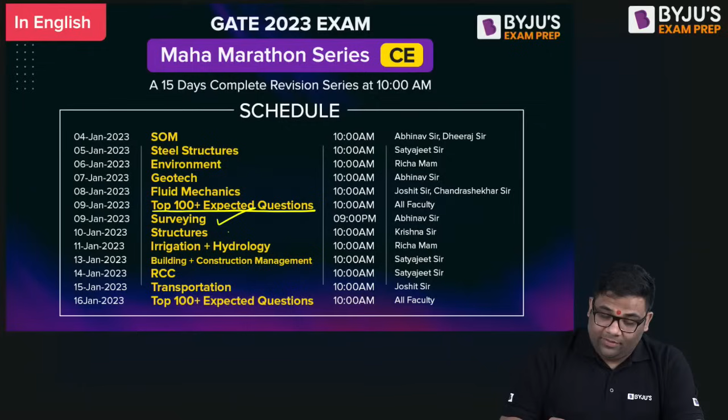Then environment by Richa ma'am, then geotech by Abhinav sir, then fluid mechanics by Joshit sir and Chandrashekhar sir. On the 9th, we are coming up with an expected question series by all the faculties, a mixed session. What happens is that when you're studying only one subject each day, in between we should mix the subjects so we get acquainted with mixing of subjects. There will be a top 100 expected question session, and then we'll continue the marathon with surveying, structures, irrigation, hydrology, building material, CPM, RCC, transportation. So all the subjects will be covered.

We will try to cover as much as possible, whatever has the highest probability. Now time is less, so we should study those things which have the highest probability of being asked in the examination. We should focus on that. So let us start the session without any further delay.

First of all, I will be starting with welded connections. In welded connections, what questions will they ask? They will ask about specification of weld, strength of weld, eccentric welded connection with combined shear and bending, and eccentric welded connection with torsion. Out of these, the first three will be more important, though it doesn't mean torsion won't be asked, but I'll give those more importance. So let's start with the specification of weld.

First we'll see the size of a weld. If you are welding two surfaces like this, this is a fillet weld because the two surfaces are not in the same plane. We'll be discussing fillet weld because most questions are from fillet weld. When you're welding these two surfaces like this, the weld you have done can be approximated as a triangle. This is known as the weld triangle.

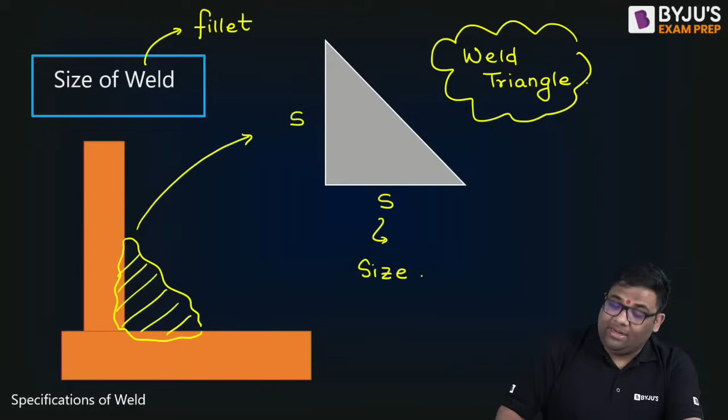Now in examination, what can they ask you? They can ask you the minimum size and maximum size, as an objective 1 mark question. So what is the maximum size of weld?

First of all, to understand the maximum size of weld, you need to know which type of member you have connected. You have connected two plates, you can see here two plates. It is called two plates, or it is also called as what? Square edge. So directly I have taken the provisions from the code.

These screenshots are directly from the code. I will be discussing many things from code and taking screenshots so that you also trust that whatever sir is telling is from code only. So all these are directly taken from IS 800, and I will be showing you the pictures from the IS code also.

This is square edge, yes this is square edge. And this is what? This is round edge, this is round edge.

Now when we are taking the maximum size, you can see that we are welding two plates like this. You have to leave some minimum gap, right? This minimum gap is 1.5. And therefore this becomes the maximum size.

And this maximum size depends on the thinner member. The maximum size will be how much? It will be, I can say, T minus 1.5, because at least 1.5 gap you will maintain. So this is T minus 1.5, where T is the thinner plate, thinner member, I can say.

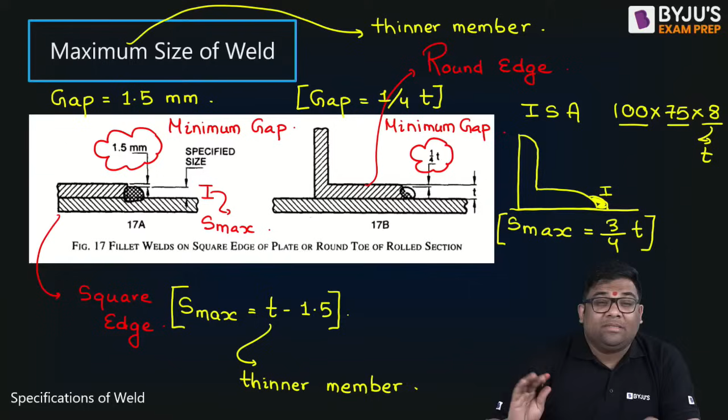So in the examination you have to be a little careful about what they are asking - the gap or the maximum size. Like in square edge, if I ask you the gap, the minimum gap is 1.5 mm. And here the gap is 1/4 of T, and maximum size is 3/4 of T. So please don't jump in the examination seeing the question - read whether they're asking the maximum size or the minimum gap. You have to be a little careful about that.

So this is the maximum size. Now coming to the minimum size - rebates are not part of syllabus, so ignore that, forget it. Minimum size of weld: like you see, maximum size was depending on the thinner member. So minimum size will depend on what? Tell me in the comment section - minimum size of the weld depends on what?

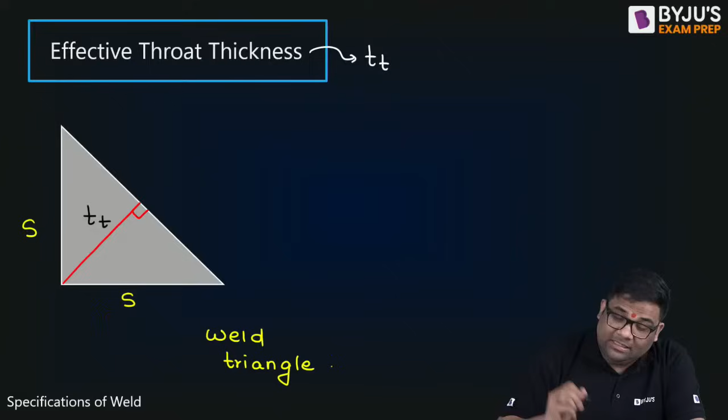And this shortest path is known as the effective throat thickness - the shortest path. So I can say this is the shortest path of failure. I can also say this is the weakest section, because the shortest path of failure is the weakest section of a weld triangle.

Now what does the code speak about, how to find out this throat thickness? Let us see what code writes. We will refer to codal provisions regularly in this course. The codal provision is telling that for the purpose of stress calculation, the effective throat thickness will be taken as K times the size, K times the fillet size or K times the size of the weld.

And this K will be taken from a particular table. Now what is that table? The table is this one, directly taken from code. You can see that for the fusion angle between 60 to 90, it is 0.7.

And after that, you see 91 to 100 there is a decrease of 0.05, again 0.05, again 0.05. So you can see the decreases are 0.05, 0.05, 0.05 - it's easy to remember. It starts with 0.7 and then continuously decreases by 0.05.

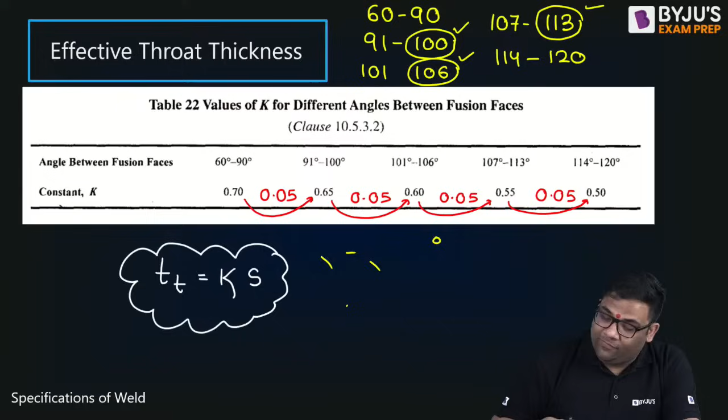So let us solve some questions now, but before that, the actual length of weld. What is the actual length of weld? Now see, you might be seeing diagrams like this. This is the plate and this is another plate, right? Another plate, right? So in the drawings...

Suppose they have shown the weld like this in the drawing. Now this weld which is shown in the drawing, that is the effective length. That is the effective length of weld, LW. So whatever drawing they have shown, that is the effective length. The actual length is a little more than that.

So how to find out that? Let us see. It is written: the effective length of a weld of a specified size. How are we finding that? But after that something is written: the actual length of the weld is made up of the effective length shown in the drawing plus 2 times the weld size.

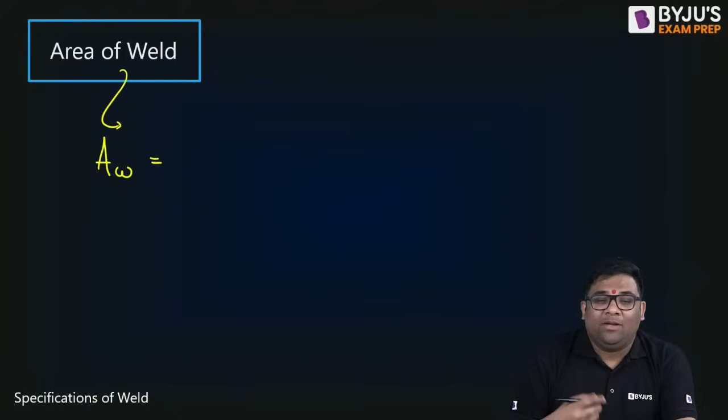So now based on all these things, let us solve some objective questions which they can ask in the examination. First objective question—but again one more thing is area of weld. What is this area of weld? The area of weld is AW. That is simply LW into throat thickness—the effective length into throat thickness. That gives the area of weld, effective length into effective throat thickness.

Good morning, Kavya.

So now, what I've told—we have discussed S maximum, S minimum, the throat thickness depending on the size, KS, then we discussed actual length, effective length, and the area of weld. Okay, great. So, finally, first question—answer this question then.

I'll switch on the AC. Some problem happened.

See, it's an angle section, means what? Round edge. 3/4 of the thickness is the maximum size of weld. So this is the thickness. So 3/4 times of this, I can say directly 7.5 mm. Directly 7.5 mm, 3/4 of your 10.

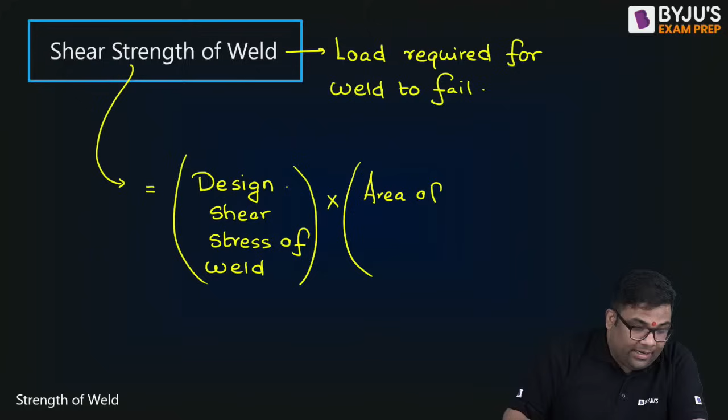So this I can say is the shear strength of weld that I write as: Design shear stress of weld into area of weld. Very simple as that. Design shear stress of weld into area of weld.

Now how to find out design shear stress of weld? The design shear stress of weld is the ultimate strength divided by root 3 into gamma mw. Now the weld material is also steel, right? So steel means there will be two stresses, right?

We know that if you draw the stress versus strain graph, you will get something like this: first a straight line and then something like this, yes, this is the curve, right? So this is the ultimate stress in the steel and this is the yield stress. So when we are finding this design shear stress, we take the ultimate one. Ultimate divided by root 3 into gamma mw. This is the partial factor of safety, or factor of safety for your weld.

And then this value, how much is it? This can take two values, right? If you are doing the welding in the field, then we'll take this as 1.5, right? And if you are doing it in the shop, means workshop, or in a factory, take 1.25. So you can see this is very simple: remember Fu, then you have two factors, root 3 for shear strength and then gamma mw because you have to use the factor of safety. Now area of weld I just told, it is Lw into throat thickness.

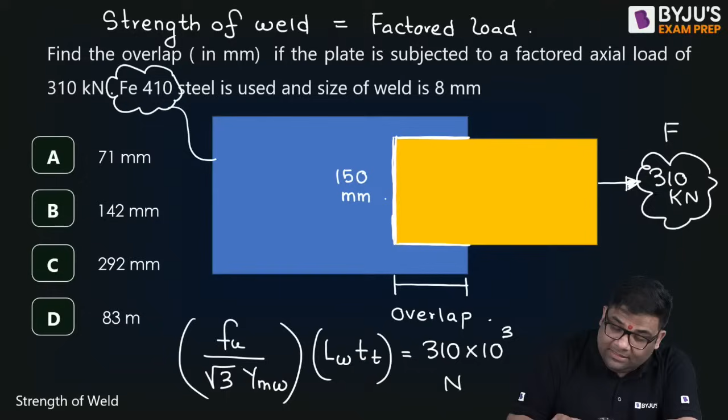This is the equation. Now in this we have to see different terms. See, whenever they write Fe410 steel, what does that mean? This means this particular steel has Fu of 410 and Fy of 250 Newton per mm square. You have to remember that whenever they write Fe410 steel, that means it has Fu of 410 and Fy of 250, right?

Now nothing is mentioned. When nothing is mentioned, by default you will take gamma MW as 1.25 for the workshop. This is the default you will take. If they mention field, then take field value. Otherwise, by default you will take 1.25.

Now, nothing is mentioned, that means you will take the throat thickness as 0.7s. When nothing is mentioned, you take the throat thickness as 0.7s. If fusion angle is mentioned, then we can find out, otherwise not mentioned - so this is how much? 0.7 into 8, this is the size of the weld given.

So 5.6. So ladies and gentlemen, everything is given, or indirectly given. Throat thickness is given as 5.6 mm, then your FU is given as 410 Newton per mm square, okay, gamma MW you will take as 1.25. So by taking all of this, can you give me the LW?

Can you give me the LW? Tell me the LW, how much LW you are getting? Tell me, how much LW you are getting by taking this?

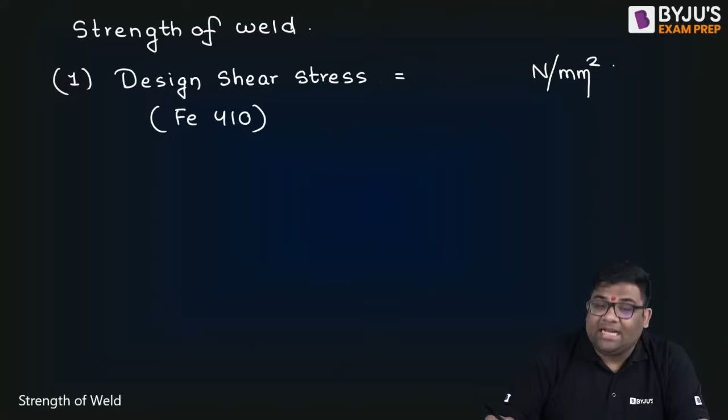Suppose I am telling you it is Fe410 steel, can you give me the design shear stress in Newton per mm square? Tell me, what is the answer to this?

Very good, very good. Directly it is Fu by root 3 gamma MW.

Ladies and gentlemen, be careful that they will ask you small things also. Yes, small things also. I will just request all the students to tell, is there any background noise coming?

Are you hearing any background noise of the AC? That duck duck duck sound? Are you hearing that or not? Yes, it is coming, I'll switch off the AC then. Now it is fine, I think. Now it is fine, na? I think now it is fine. Okay, now also it is like some helicopter sound, little bit. Fine, okay. Now okay, but again it increased. I'll switch it off. Santi.

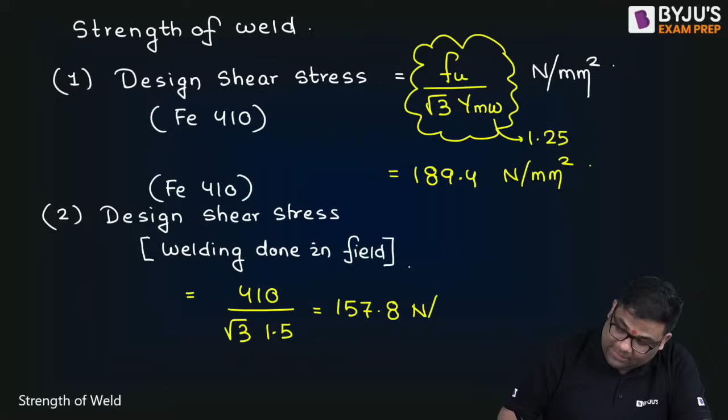Or else, if they ask you the load, this was stress, na? If they ask you the load, you have to multiply simply the LW into throat thickness, LW into throat thickness, that's it, right? Okay, now let us go to the next thing, eccentric welding subjected to shear and bending.

So what I was telling is that eccentric welded connection is subjected to shear and bending. Suppose this is an I section, and suppose we have a plate welded to this like this, and there is a load acting, with welding done over here. I will draw the weld in red color.

The welding is done - I will draw it in red color just to show that welding is done. Weld is not actually red color. And suppose a load P is applied like this. So you can see that from the weld plane, it is at an eccentricity of E from P.

So what happens? There is a bending moment P into E. When you transfer the load, whenever you transfer the load, we have to create a moment also, right? So there is a bending moment. So I can say there are two things acting: one is the force P, and the second one is the moment P into E.

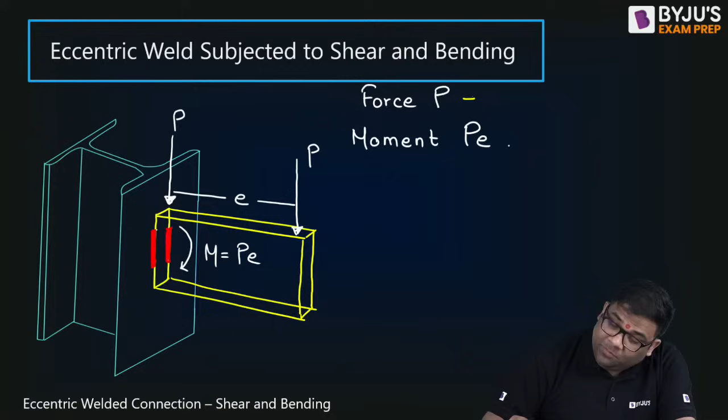Now see, this P is acting in the plane of the weld. So this force P generates direct shear. And the moment generates bending stress. This bending stress is normal stress, right? Yes, this generates direct shear stress.

Okay, Q - and bending stress is normal stress, na? And the normal stress is equal to FB. So therefore, this is a case of eccentric welding subjected to shear Q and bending FB. Now how to find this we will understand, and we will solve a question.

Now very simple, okay. If you see this particular diagram, from the side it will look like this. Suppose you have welded like this - from the side, this is the I section and this is the plate, or it might be another I section also. So it will look like this. This is the P force, this is the E.

So when you transfer the load, what will happen? The P force will act like this, which will act as the shear force - relatively direct shear - and there is a bending moment of how much? P into E. Very nice, right?

Now this will look like this. If I am seeing from this side, it will look like this - the two sides it is welded. So this is welded - this is the depth of the weld. I will call this the depth of the weld. And this will be the throat thickness. This also will be the throat thickness.

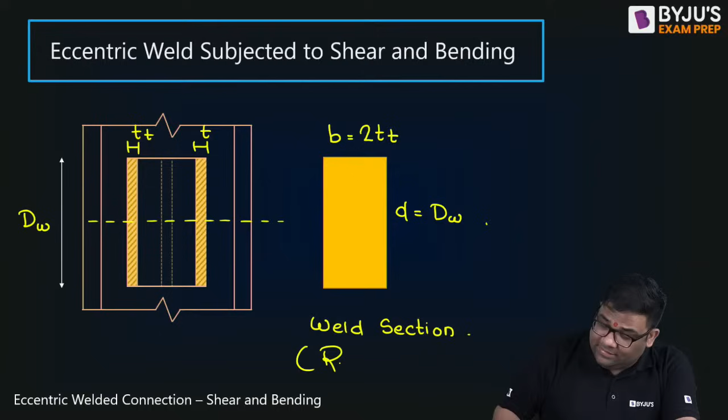So, ladies and gentlemen, this becomes the weld section. So the weld section is having width of 2 times the throat thickness, and depth equal to the depth of the weld. It becomes a rectangular weld section. No need to remember many things - very simple strength of material.

Now what happens here - this width is 2 times the throat thickness, and this depth is equal to the depth of the weld, which will be given in the question. Now, I told that this weld is subjected to 2 things - P, and second one is P into E, the moment.

Due to this there will be shear stress Q. Now shear stress is load by area - so load by simply area of weld, that is B into D. Yes, easy, rectangular area. So B into D. Now, due to this bending moment, there will be bending stress.

And what is the maximum value of bending stress? We have studied in strength of material that it is M by Z. Now M is P into E. Now Z is the section modulus, and section modulus is I by Y max. For a rectangular section, I is BD cube by 12, and Y max is D by 2, giving me BD square by 6.

Game over - so easily we can find out the normal stress, easily we can find the shear stress. This is the direct shear stress and this is the bending stress. See, basically it is strength of material. Once you have drawn the weld section, it is strength of material - that's why strength of material was covered yesterday first. This is weld area, then strength of material. Very simple, right?

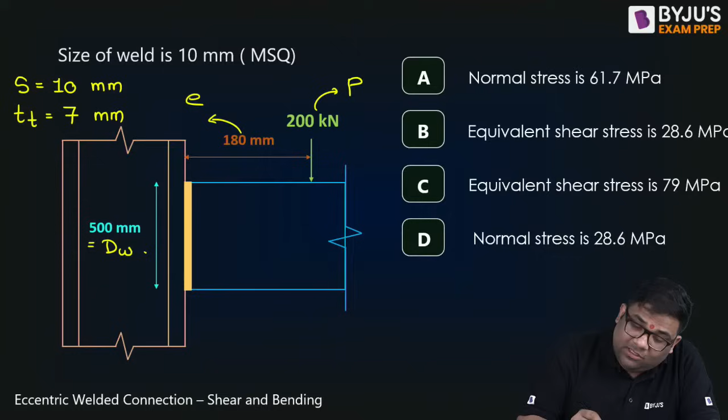See, size of the weld is given, that means S is equal to 10 mm. So what will be the throat thickness? The throat thickness will be 7 mm by default, since nothing is mentioned, so throat thickness will be 0.7 into S. That is 0.7 into 10, equal to 7 mm.

That is okay. Now we have to draw the weld section, the weld area. What will be the B and D? The B will be equal to 2 times the throat thickness, that is how much? I can say 14 mm, right? And the depth will be the depth of the weld, that is 500 mm.

So I know the B and D. If I know B and D, I can easily solve the question, because P and E are also known. So please solve and tell me which options are correct. MSQ, a typical MSQ question, okay? I thought that we'll be solving some MSQ also. Yes, answer.

You need to just draw the section correctly, right? Just draw the section correctly, half paper question is done. A and C, so easy question. So you are easily able to solve this kind of question, right? It will be easily done. So MSQ, don't worry about MSQ.

Tell me now, ladies and gentlemen, if you know the concepts nicely, is there any special worry for MSQs? Should you prepare something separate for MSQs, or is whatever studies you are doing sufficient? If you have done the studies nicely, then there is no requirement of any separate study for MSQs. From the same concepts only, they will form a different option. So don't worry about MSQ, focus on understanding the concepts. If you understand the concepts, MSQs are also easy.

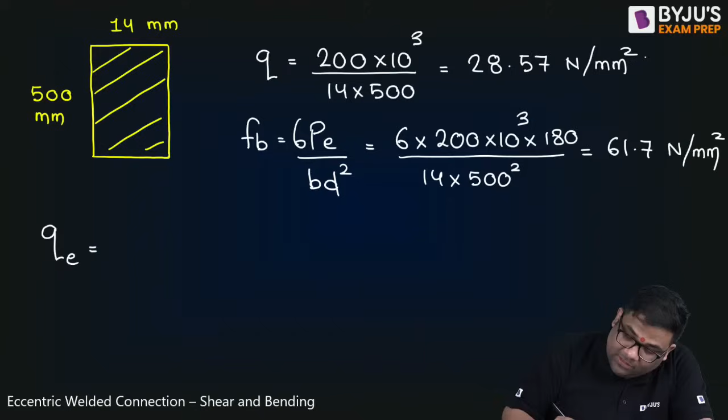Yes, so I can easily find out the equivalent shear. So the equivalent shear stress will be how much? Root under Q square, 3 is Q square, so FB square plus 3Q square. How much are you getting this value? Root under 61.7 square plus 3 into 28.6 squares. So how much are you getting this equivalent shear stress?

79.1 Newton per mm square.

Let us go to the options now. So normal stress is 61.7, that is correct. Equivalent is also correct. Normal stress is not 28.6, shear stress is 28.6. So answer is what?

Answer is A and C. Try to understand, ladies and gentlemen. The small q is the shear stress. Bending stress is the normal stress.

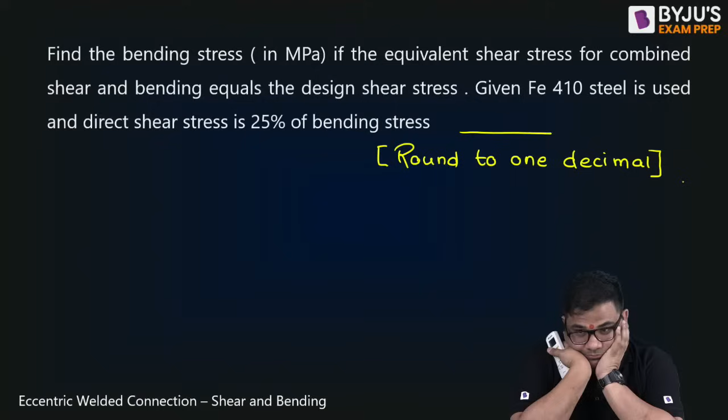Let us switch on the helicopter. First you try, take your time and try.

Helicopter is not landing. Hey bhai, land ho ja bhai. Ha, landed. Okay, let us solve this.

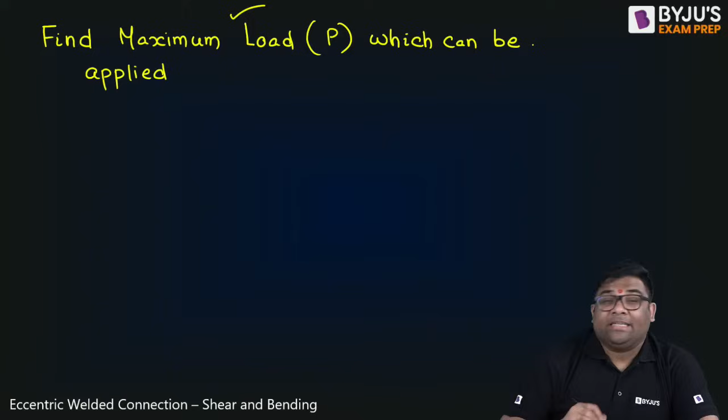So when they ask questions like this, how to solve? This is reference to the previous question. Very easy - maximum load will be for the condition when the equivalent shear stress is equal to the design shear stress. Because if you apply more load, it will cross the design shear stress and the weld will fail. So maximum load will be for this condition.

Now, what is the shear stress in terms of P? That is P by area. Suppose P is in kilonewton, if I want to find the stress in Newton, I'll convert P into Newton, divided by area. What was the area of that weld? 14 into 500, right? In the previous question, if you remember, the weld area was this one.

14 into 500, right? So how much Q you are getting? Tell me, in terms of P you will tell me. Almost 0.143 P, right?

Now, next is FB. FB was PE by BD square by 6. So what I can write, this is 6 into P, I'll convert P into Newton. Then E is fixed, that is 180, divided by BD square. So can you find out FB in terms of P? Tell me how much is FB in terms of P. Find out that.

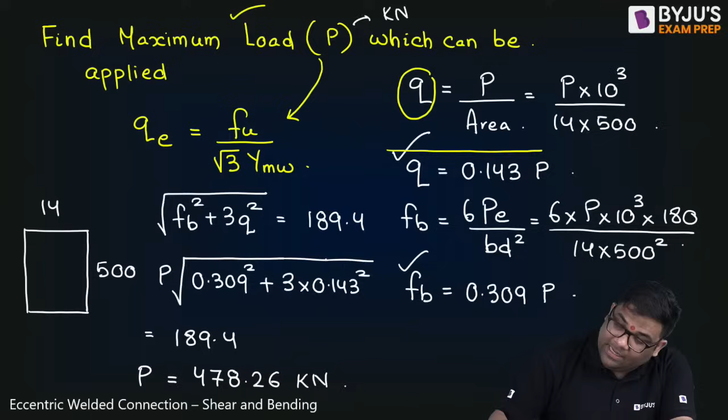The second type of question they will ask in the examination is that they will ask you the maximum load which can be applied, like this. So what do you do in that case? The area of weld will be fixed, so you'll find out the direct stress in terms of P like this, and then you will find out the bending stress in terms of P like this. Then you will find out the equivalent stress in terms of P, and that you will equate to the design shear stress.

By this you can find out P. Just remember, the P you will take in kilonewton, so while finding the stresses, don't forget to multiply by 10 to the power 3. There are two types of questions they will ask in the examination from this eccentric welded connection. Hope everything is clear to you, right? This kind of question I solved for you, and miscellaneous and aptitude type questions also they can ask from the same equations.

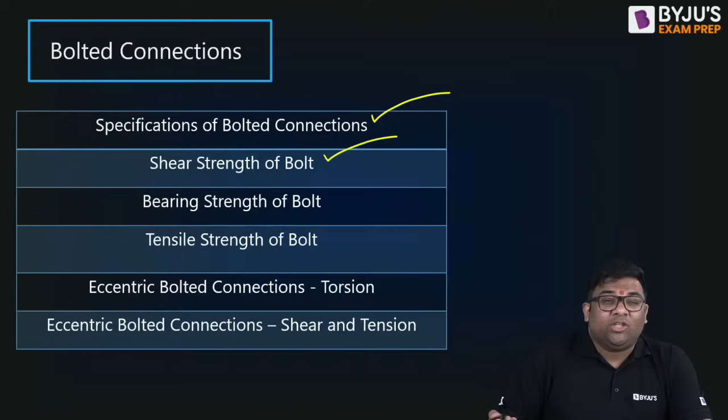Time for bolted connections, time for bolted connections. In bolted connection, ladies and gentlemen, these are the important topics: specification of bolted connections, shear strength of bolt, and then the bearing strength and the tensile strength. There are three types of strength of a bolt: one is the shear strength, one is the bearing strength, and one is the tensile strength they will ask you. And specifications they will ask first - a lot of questions are asked from specifications. Then there is eccentric bolted connection - torsion, and eccentric bolted connection - shear and tension.

Chalo, then we'll start the session. We'll start with specifications of bolted connection.

In specifications of bolted connection, the first thing is minimum pitch. Now when discussing minimum pitch, first understand what is pitch. If you have a bolted connection connecting two plates, and force is applied in this direction, then the center to center distance in the direction of force is known as pitch.

Now when we are talking about minimum pitch, what does the code tell? The code tells, and this is directly from code, it is 2.5 times the nominal diameter of the fastener, or bolt. So the minimum pitch is equal to 2.5 times the nominal diameter of the bolt. This small d is the nominal diameter of a bolt.

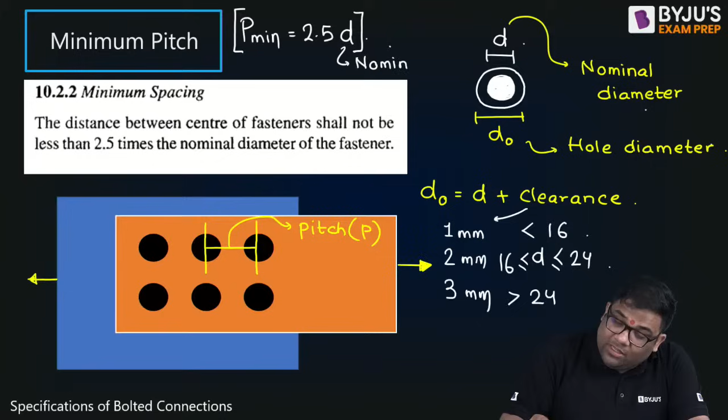So minimum pitch, remember, does not depend on the hole diameter. It depends on the nominal diameter.

Next thing, the maximum pitch. The minimum pitch was independent of whether it's a tension member or compression member, but maximum pitch depends on whether it's a tension member or compression member. It is written that the distance center to center between two adjacent fasteners or bolts, that is the pitch, should not exceed - shall not exceed means less than equal to, or the maximum value is equal to

16T or 200 mm, whichever is less, meaning whichever is minimum. This is for tension members. If you are applying tension to the connection, then this is the rule for maximum pitch.

Now the same maximum pitch becomes 12T or 200 mm, whichever is less, or minimum, if it is a compression member. So these are the clauses for minimum pitch or maximum pitch.

Rightly they can ask questions on this, we'll solve problems too, don't worry. Now next thing is minimum end or edge distance.

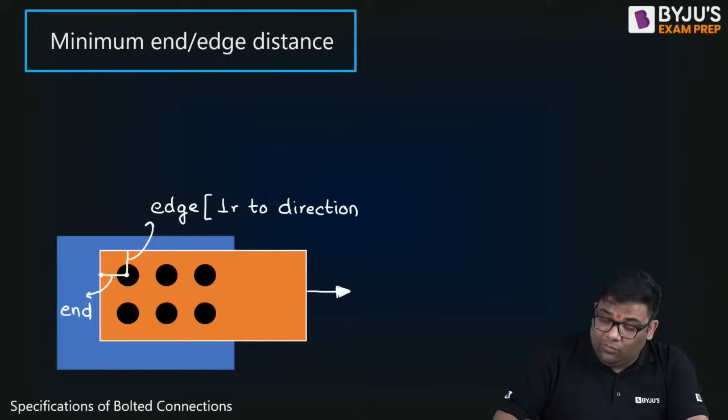It is edge distance, very understandable, but still definition wise, it is perpendicular to direction of force. Whereas this end distance is parallel to direction of force. Now these small things can also be asked as objective questions, therefore we are discussing direction of force. Now what does the code tell about this?

What will be the minimum end or edge distance? The code tells that the same clause is applicable. It is 1.7 times the hole diameter, not the bolt diameter or nominal diameter as in minimum pitch. It is the hole diameter if it is sheared or hand flame cut.

And it is 1.5 D naught when it is rolled or machine flame cut. By default we can take this one, either machine flame cut or rolled, since normally we find this. So by default we take this if they don't mention anything. If they mention hand flame, then you have to take 1.7, but if they don't mention it and we are not told, then we go for this 1.5 D naught. This is the minimum end or edge distance.

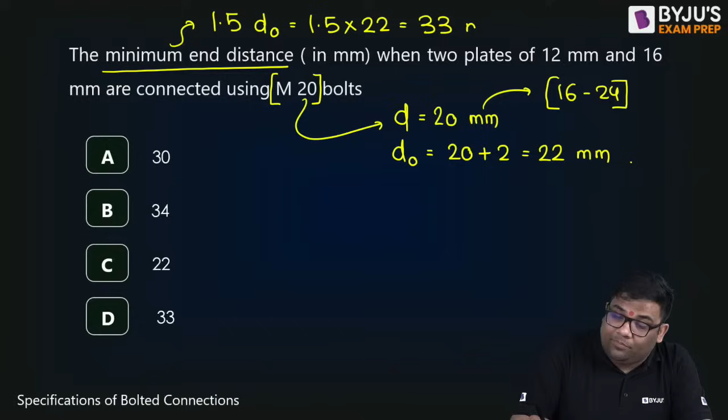Whenever they write M20, it indirectly means the nominal diameter or bolt diameter, given as 20 mm. So what will be the hole diameter? This falls in the range of 16 to 24, so the clearance will be 2, giving 22 mm. It is asking minimum end distance, so we take 1.5 D naught, which gives 1.5 into 22, equal to 33 mm. So typical 1 mark question for gate.

Next question, solve and tell me the answer. The minimum pitch when two plates 12 mm and 16 mm are connected using M20 bolts. M20, M22, M16, that means the bolt diameter or nominal diameter. Remember that. Answer this.

What is the answer to this? Minimum pitch is 2.5 times of simply D, not D naught, simply D. Straightforward question, 2.5 into 20 giving 50 mm. Next question.

Solve this question. The maximum pitch. Read the question properly. All the 4 options I will fill in. Let us see. Solve this.

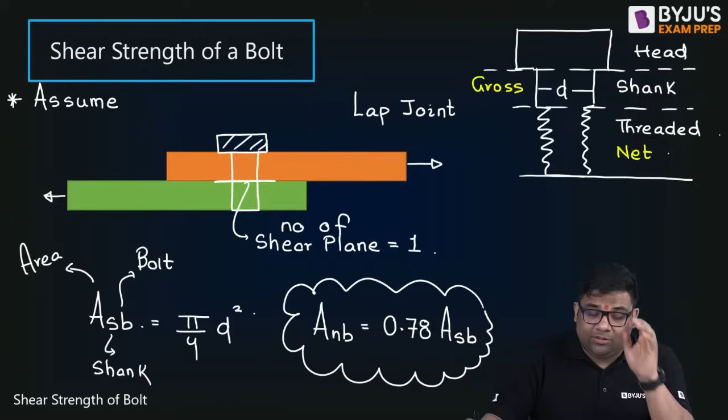Now this shear plane by default, it can pass through the shank area also, it can pass through the net area also. But if it is not mentioned in the question whether it passes through shank area or net area, then what do I assume? Assume the shear plane passes through net area. This is the assumption we take if it is not mentioned in the question.

If they give shank area, very good, I will take that as shank area. If they give net area, very good, but if they don't mention, then I have to make this assumption. Okay, so this is a lap joint we saw. In a lap joint we have one shear plane, it passes through the net area, nothing is mentioned.

Now the next thing is a butt joint. You can see it's a butt joint. Here in a butt joint, these are known as the main plates, and these are known as the cover plates - main plates and top and bottom cover plates. And this is known as a double cover butt joint.

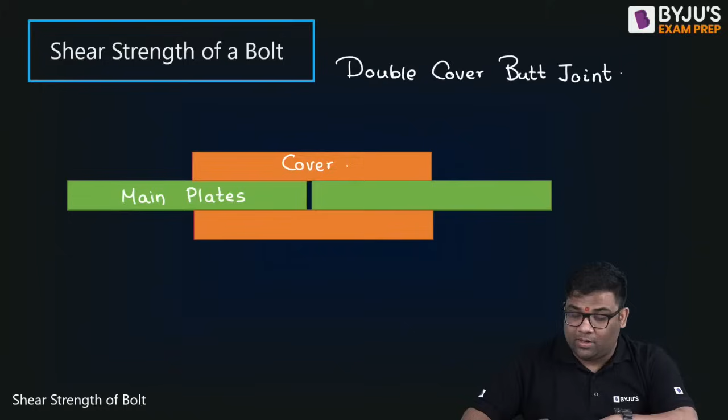Now, if I have a bolt like this, let me just draw one bolt here. If I draw only one bolt, I have bolted like this. You can see that there are two shear planes - one shear plane is this, one shear plane is this. So there are two shear planes in a double cover butt joint.

And I assume that both of them pass through net area if nothing is mentioned. Now coming back to the shear strength of the bolt - this is the load, I can say. Shear strength of bolt is actually the load. So how do we find out the load?

Pardon me, just have a cough. There must be two bolts. I told that I am drawing only one bolt, but I will draw two bolts now. I will show you the top view, and I will show the threaded portion.

It was just to show one bolt. Let me draw so you can understand, but I don't want to just draw randomly - understand the context of what sir is explaining. I told you I am just showing one bolt, but there must be two bolts.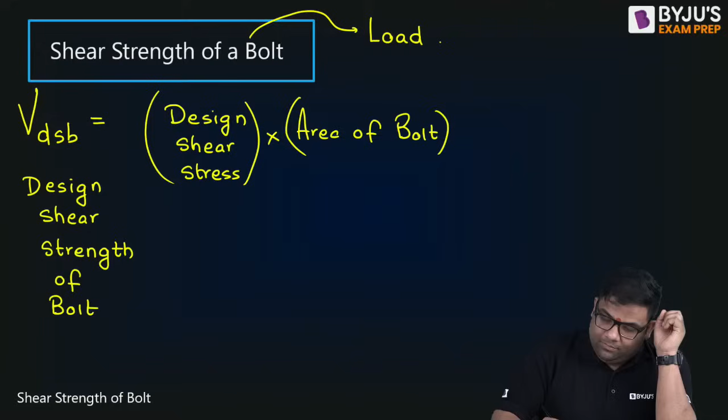Now see, design stress will be very similar to what we studied in weld. Remember there we studied Fu by root 3 gamma mw, right? Here it will be similar, but in case of weld it's W, here it will be B because it's a bolt. And here it will be FUB, which means the ultimate strength of bolt. So it's very similar to what you studied in weld actually.

And here, since all the bolts are prepared in the workshop, it will always be 1.25. Here there is no concept of 1.25 or 1.5 separately. In weld we have the concept of 1.25 and 1.5, but here only 1.25.

Now how to find out this FUB? That comes from the grade of bolt. So if we have a grade of 5.6... let me take something else, like 4.6. How to find out? You take the number before the decimal and multiply by 100. Suppose I'm taking 4.6, so 4 multiplied by 100 gives 400. This is your FUB - this is how you find out FUB.

Now you take the remaining 0.6 and multiply it with the FUB. You will get the FYB. Easy - I can say 240.

Now suppose I tell grade 8.8. In this case you take the 8 and multiply by 100, I get 800, right? You take the remaining 0.8 and multiply with the FUB, this gives you FYB. Multiply with this, suppose I am getting 640 - that is FYB, the yield strength. This is yield, this is ultimate, and here we use ultimate.

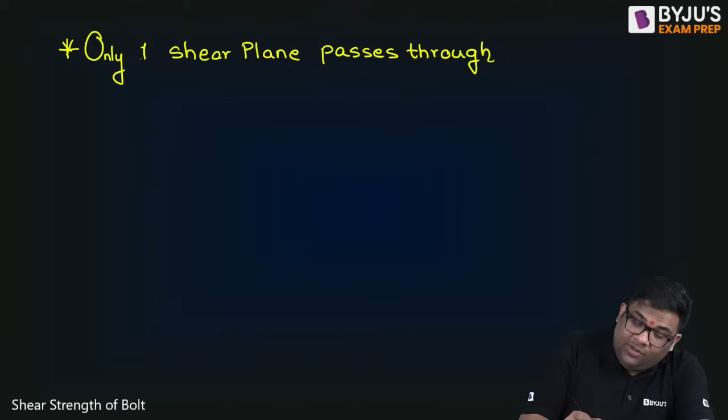D option was for that case. Now suppose it was asked in the question that one shear plane passes through net area. If it is only one shear plane passing through net area, that means the other one will pass through shank area. If it is written in the question that only one shear plane passes through net area, then the other one is passing through shank area. So if this particular line is given, tell me what will be the shear strength. Solve it.

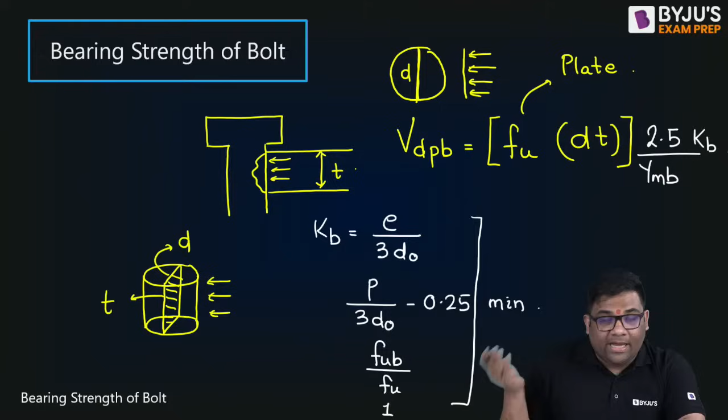Next is P by 3 D naught minus 0.25. Next is FUB by FU and 1. So I can say that KB is the minimum of these values, where E is the end distance, D naught is the hole diameter, P is the pitch, FUB is for the bolt, FU is for the plate. Remember this, plate. So now this equation is easy to remember.

Let us see what the code tells about this. The codes obviously will be writing in a complicated language, so we'll simplify that. The code speaks that, you see, what is it writing? They do the same confusing thing for people, but I will try not to confuse you. So see, D into T is the area, Fu is the stress. And this Fu is for the plate.

So stress into area. Then we have 2.5 and KB is the nominal one. Finding the design one, what do we do? We divide by gamma MB. And KB is the minimum of E by 3 D naught, P by 3 D naught minus 0.25, FUB by FU, and 1.

Solve one question. MSQ. Chalo, so let us solve this question.

An M20 bolt. M20 means D is given as 20. Grade is given, and from grade we find out things we know. Now, it's a lap joint of 2 plates, each having a thickness of 16 mm. So this is the T. Then this is your FU, because for plate it is this.

FUB is how much? FUB is 400 Newton per mm square. And FU for the plate is 410 Newton per mm square. See, FUB and FU will be different. FU is for the plate, FUB is for the bolt. Pitch is given and edge distance is given.

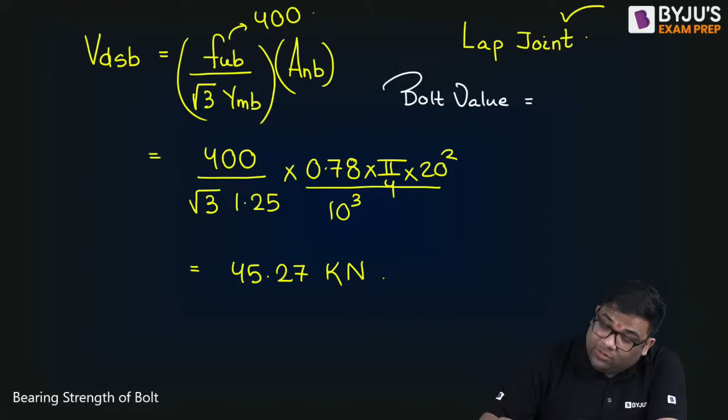Understood everyone this question? Okay, not asked, I have just extended it. Now suppose I am asking you to find out the bolt value. If they ask you the bolt value or strength of bolt, it is always the minimum of the shear strength of bolt and the bearing strength of bolt.

And that is how much? Here the bolt value is 45.27 because the shear strength is minimum here. So in the examination they can ask you bearing strength of bolt, you can find out. They can ask you the shear strength of bolt, you can find out. They can ask you the bolt value - if so, take the minimum of these. Bolt value, or I can say only strength of bolt.

Now if they ask you number of bolts, or minimum number of bolts you will use, that will be how much? The factored load which is coming, divided by the bolt value.

Suppose I am telling that a factored load of 300 kilonewton is applied. Then what number of bolts you will require, tell me? Just divide it - 300 divided by 45.27, I am getting a value of 6.63.

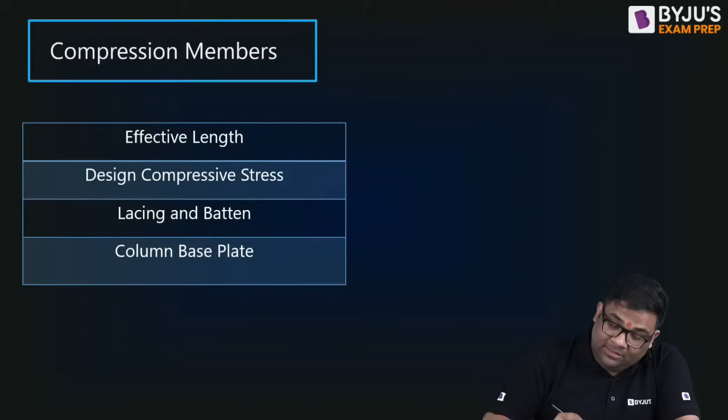Okay, very good. Let us go to the next thing I wanted to tell all of you - that is compression members. Let us study something about compression members which they can ask in the examination. In compression members, they can ask you effective length, design compressive stress, lacing and batten, and column base plate. What are these things? You see, if you have a compression member, a column like this.

Compression members can be found in two forms. One is the typical columns you get, like in a beam column frame structure - this will be a beam and this will be a column. This is a compression member. Now in a truss, we know that the truss members only take axial load.

If they are taking axial load, we know how to analyze the stresses using method of section and method of joint. Now we know that some members will get compression, some will get tension, and that is very random - we can't say which one will get compression or tension until after finding it.

So suppose this member is getting compression - if you see the cross section, axial compression is coming into the picture. So this is also known as a compression member. So columns are compression members, and these truss members which are taking axial compression are also compression members - they are known as struts.

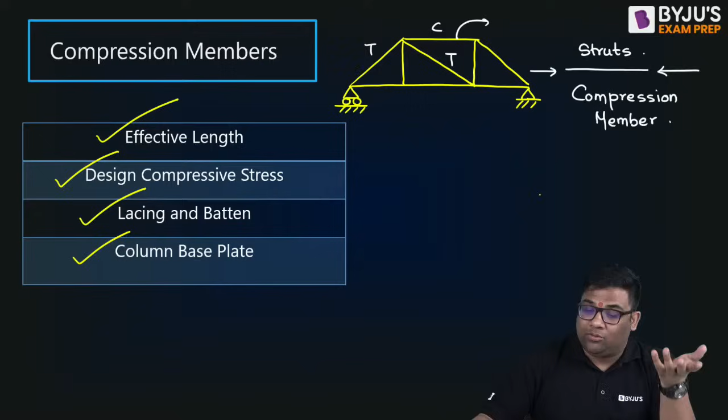When used in a beam column frame structure, they are known as columns, sometimes also known as stanchions. So struts are compression members in trusses, and columns are the compression members in a framed structure. And both of them take axial compression - let that be a strut in a truss or a column in a frame structure, both take axial compression.

So what will they going to ask in the examination? First, they will ask you effective length. Then they ask you design compressive stress. Suppose we have a column.

Okay, we have a column. In a column, if we know how much stress I can apply, FCD, this is the design compressive stress. Now if I know how much is the design compressive stress, by multiplying the area of the column, I can find out the design load.

But how much design load can I apply? How much load can I apply on this particular column so that it doesn't fail? To find out the design compressive load, you have to find the design compressive stress FCD into area. The area will be known, obviously the cross section area we can find out. So how to find out this design compressive stress, that is asked.

Let us explore them one by one. First one we will study is effective length. So directly we'll go to code. Now these are the effective lengths as per IS code 800 and also as per IS 456. As per both, these are the same code. Now both of them take the effective length from Euler's buckling theory.

But what the code does, the code will add some spice. It will change the thing a little bit, because buckling theory is theoretical. So adding some practicality into the picture, they will change it. How they will change? Let us see.

What is K? This effective length is K into L. This effective length of a column or compressive member is K into L. So to know the K, rightly I have written K into L. You can see here the K is 2. You can see that here this end is fixed, the other end is free.

So how do we denote that? When it is fixed, that means there will be no translation. It cannot move. There is no lateral movement, and there is no rotation also. It cannot rotate, fixed now. But the other end is free, so it can translate, it can rotate.

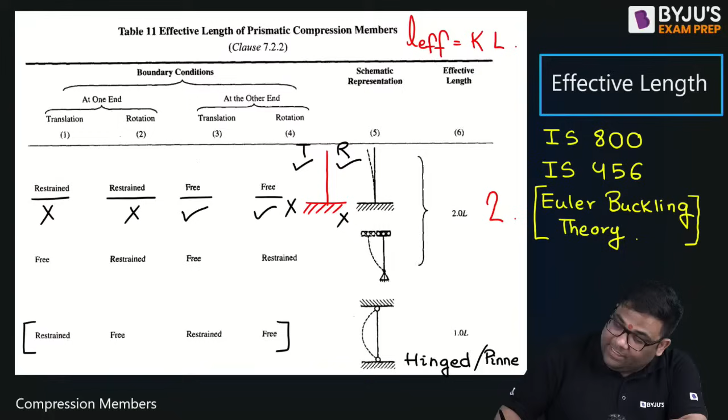Here what happens? Both ends are pinned or hinged. When both ends are pinned or hinged, that means it can rotate - so rotation is possible at both ends. But it cannot move, there is no translation. Therefore the translation is restrained, lateral movement is restrained. This is simple, I have told this many times.

I will again repeat this is rotation. Rotation restrained means it cannot rotate, it can only translate like this. It cannot rotate here, but here it can rotate. So it can rotate at its own place like a hinge, but it cannot translate. A hinge also cannot translate, right? So K is 1 here.

Now this language is why I am focusing, because in the examination they might not give you both ends pinned directly. They will use some language, and that is where students get confused. Therefore I am discussing this.

Now the next thing, we'll start from the bottom here. You see, here both ends are fixed. Both ends fixed means translation is not allowed, rotation is not allowed, at both ends. Everything is restrained, restrained, restrained, restrained. So both ends are fixed.

Now in this, theoretically the K value is 0.5, right? Theoretically it is 0.5. Code increases it to 0.65 because complete fixity is not possible. Yes, complete fixity is not possible.

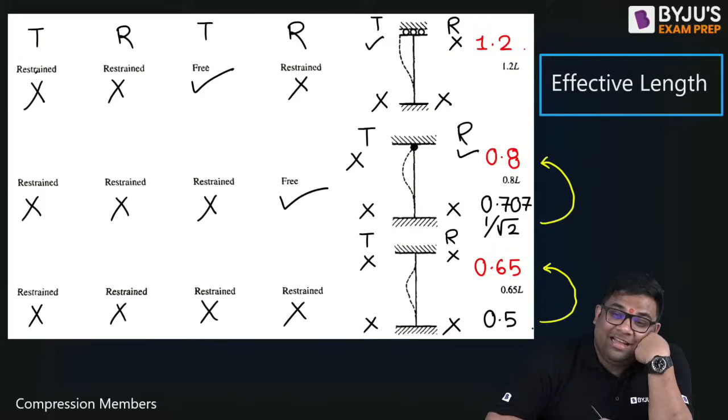I will give you another question now. Tell me the answer.

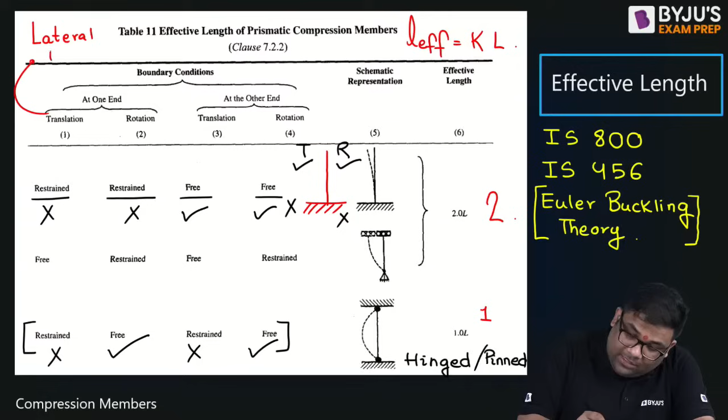Option A. Understood now? Now this kind of question you can solve, okay? Therefore it is important to understand these languages. See, held in position means restrained against translation - translation is also lateral movement. Remember these words. Translation means lateral movement. Same thing - and if they ask held in position means translation is restricted, held in direction means rotation is restricted. Restricted, restrained means not allowed. So many language combinations they can use - not allowed, restricted, restrained, allowed.

So you should know this type of question. It is very less chance that they will ask you directly one end fixed, other one free - that becomes very easy, na. But in the examination they might ask in this language, and you should be aware of this.

Those lectures will be sufficient. Chalo, so we'll study one important concept which can be asked in the GATE examination. It's a new thing, but students have not seen that. So let us start. As I told, when I discussed compression members, I told that effective length and the design compressive stress can be asked. Now to understand design compressive stress, we'll understand a few terminologies, then we'll go into the code to see what the code tells about design compressive stress. Let us start then.

Before going into design compressive stress, we'll see a few points, like what is the slenderness ratio? The slenderness ratio is nothing but the effective length by the minimum radius of gyration. Now what is this minimum radius of gyration? You take any cross section - it can be a rectangular cross section, or an I section, or a T section, or an angular section. Any section is possible, just giving few examples. Suppose it's an I section or T, rectangular section.

So we know that this is the x-axis, yes, this is the x-axis. This is also the x-axis, right? And this is the y-axis - this is the y-axis, right? Now, ladies and gentlemen, yes. So there will be a radius of gyration about the x-axis - what will that be? That will be the square root of Ixx by area, right? And there will be a radius of gyration about the y-axis, so that will be root under Iyy by area, right?

Now the minimum of these two means what? The minimum of your Rxx and Ryy will give me the R minimum, the minimum radius of gyration. Now you see this Rxx and Ryy, common is A now and square root. So how will I get the minimum one? This R minimum will be indirectly equal to the root over I minimum by A.

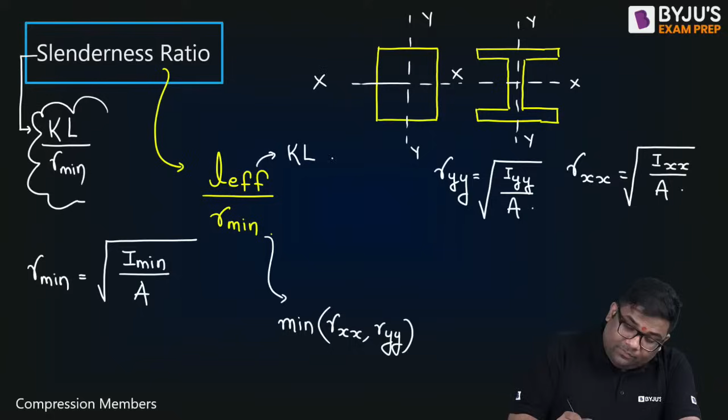This is the slenderness ratio. Now the next term we will understand is the Euler's buckling stress. What is the Euler's buckling load? The critical load was pi square EI by L effective square, and this I will be I minimum, because it can buckle about both axes, so I'll take the minimum one. This is the load, the critical load or buckling load.

Now the Euler's buckling stress, FCC, is given by what term? FCC will be equal to your buckling load divided by area. So I can write this as pi square E, then I minimum by L effective square, then A. Now what is this term? This is R minimum square.

This R minimum is root under I minimum by A, so this is our R minimum square. So I can write this as pi square E R minimum square divided by L effective square. And I can bring this R minimum down, and write that FCC will be equal to pi square E by L effective by R minimum, whole square.

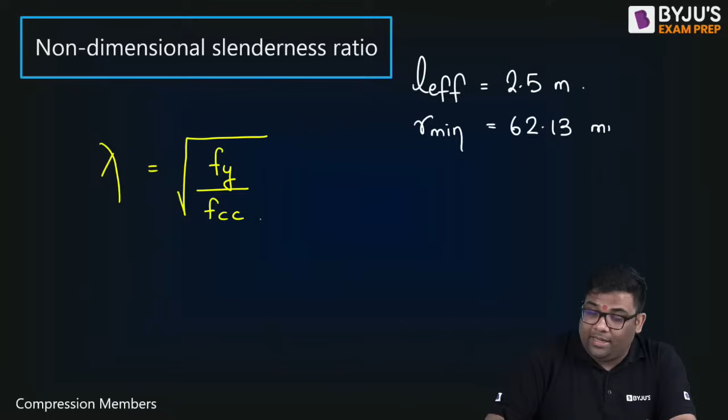Suppose L effective is 2.5 meter, and R minimum I have found out to be 62.13 mm, and E is given as 2 into 10 to the power 5 Newton per mm square. So first of all, can you find out the FCC? Find out FCC and give me, in Newton per mm square.

This will be pi square E, divided by L effective, which is 2.5 meter, I can express in mm, and R minimum is 62.13, whole square. So how much are you getting, ladies and gentlemen? Let me check my calculator. Here it is, the value.

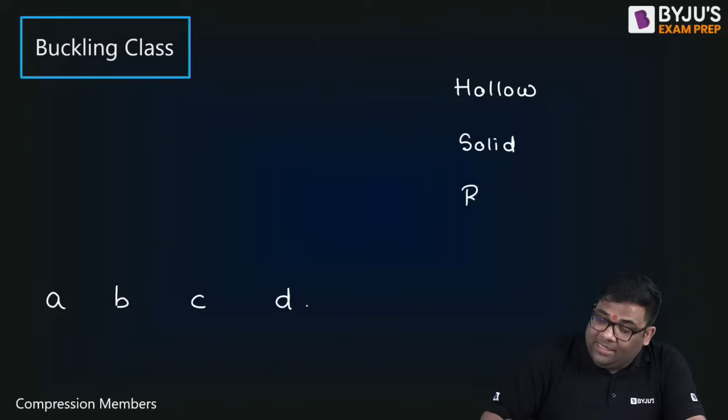which type of section it is. Now section can be hollow section, section can be solid section, section can be built up section. Built up section means what? Suppose you are combining 2 angles, it's a built up section. You are combining 2 channels, it is a built up section. You have an I section, you are placing plates over top and bottom, built up section.

So all the built up sections are categorized in buckling class C. All the solid sections are also categorized in buckling class C. All the hollow sections are categorized in buckling class A. Now I sections can be all A, B, C, D.

Solid sections means 1 channel, 1 angle, rectangular, all T section, all these are in C. But I section can be all A, B, C, D. Now, the category in which it will fall is little complicated, so we'll not go into how to find out the buckling class of an I section. It will be mostly given in the question, don't worry.

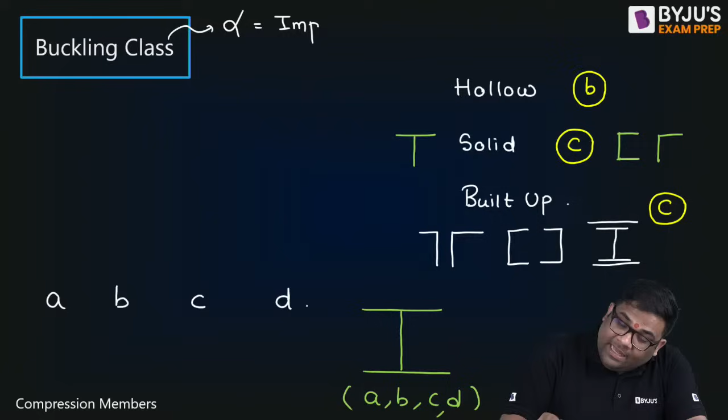Okay, so based on this buckling class, we assign an imperfection factor to that particular column. Now what is this imperfection factor? See, when you're finding the buckling stress, you're assuming all theoretical conditions - that column is perfectly straight, it is homogeneous, it is isotropic, and the load is applied at the center and perfectly vertical.

Now all these things are idealistic, right? In reality, the column will have imperfections. Obviously, it will not be perfectly straight. Obviously, the load will not be exactly at the center, it will be little here and there. Obviously, there will be non-homogeneity, it will not be completely homogeneous.

So based on that, an imperfection factor is given to the particular column. So as per the buckling class A, B, C, D, different alpha or imperfection factors are given, and you have to remember these values. For buckling class A, it is 0.21. For buckling class B, it is 0.34. For buckling class C, it is 0.49. For buckling class D, it is 0.76. These values you have to remember, because directly they can ask you a 1 mark question.

Okay, very nice, everything is nice. So next thing, this buckling class we understood, next thing is stress reduction factor. Now, we saw that buckling stress FCC, so this should be the design compressive stress, no? But code says no, this is not the design compressive stress because there will not be perfect conditions.

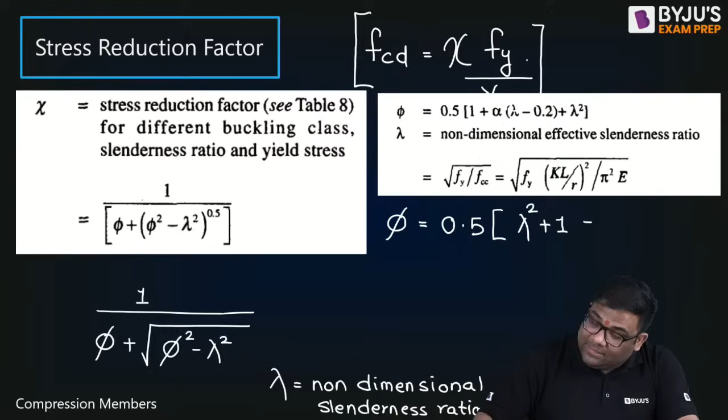This phi is given by this formula. Phi is equal to 0.5 into lambda square plus 1 plus alpha, where alpha you will get from the buckling class, into lambda minus 0.2. This is phi.

Once you find out phi, you put it in the equation and find out the stress reduction factor. Once you find the stress reduction factor, you can easily find the design compressive stress. How to find design compressive stress? It is written as FCD is equal to stress reduction factor into Fy divided by gamma m naught.

And obviously this stress reduction factor will be less than or equal to 1. If it is less than or equal to 1, that means this value will be less than Fy by gamma m naught, right? Yes.

Now let us revise whatever we have studied till now, till finding the stress reduction factor. When finding stress reduction factor and FCD, the first step is to find out FCC. How do we find FCC? It is pi square E by slenderness ratio, L effective by R minimum square. L effective is K into L, and R minimum is root under I minimum by A.

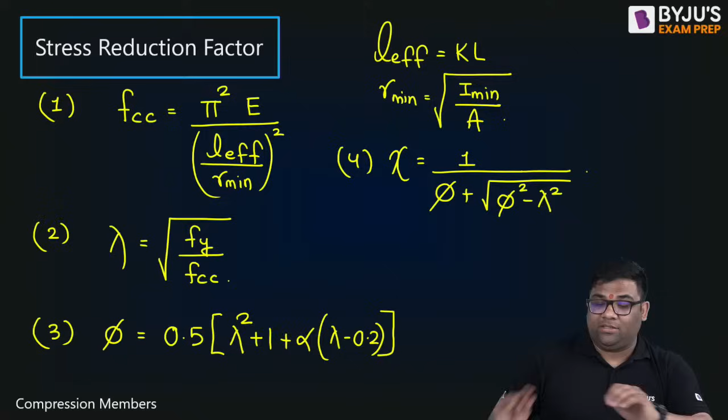Now the third step: from this you have to find phi. Phi is 0.5 into lambda square plus 1 plus alpha into lambda minus 0.2. Once you find phi, you can find the stress reduction factor, which is 1 by phi plus root under phi square minus lambda square. Once you find this stress reduction factor through these easy steps, you can find the FCD as we discussed.

Very good. Let us solve one MSQ to understand everything. So it's an I section. Whenever they give an I section, they will give you a buckling class. If it is not an I section, suppose they give a built-up section, that means buckling class C. If they give an angle section, that also means buckling class C. You should remember this.

So given: effective length is 3 meter, yield stress Fy is given, cross sectional area A is given, Ixx is given, Iyy is given to find out I minimum, and E is given.

Euler's buckling stress is asked, FCC. Slenderness ratio they have given. Slenderness ratio means what? It's not a non-dimensional one, there's a difference. Slenderness ratio means L effective by R minimum, right? Then stress reduction factor and then design compressive stress. So let us find out everything, then we can easily solve this MSQ.

First step, so we'll follow the steps. First step will be to find out the FCC. You wrote the steps, first step you find out FCC. FCC we know how to find out. Come on, find out the FCC.

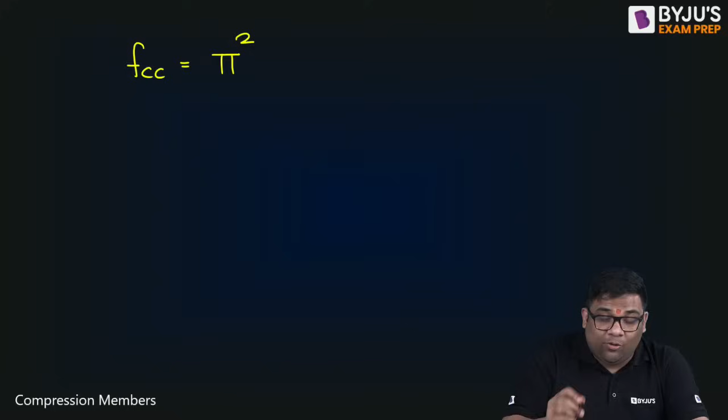FCC is equal to how much? Your pi square, it is pi square, don't forget. 2 into 10 power 5, the E is given this value. Divided by slenderness ratio, how much we got? We got 55.45 square. So FCC, how much you are getting? Tell me, if you solve this, how much you are getting FCC? 642.7, almost we can say 642.8 we are getting. We are getting this as this.

Very good, that means option A is correct, na? That means option A is correct. Now to check the stress reduction factor, I need to first find out what? Phi, na? I need to first find out phi, because lambda we have got lambda, right? I got lambda. See, 641.9 and 642, that minor variation in calculation due to the approximation, that is fine.

So the phi value is what? Phi is equal to 0.5 lambda square. Lambda square is what? What is lambda, by the way? Lambda we didn't find out, right? Lambda is 250 by 642.8. How much are you getting, lambda?

Lambda, how much are you getting? Now this is very important, they can ask in the examination, right? Now these things normally we don't find in the previous year questions, but they're asking nowadays. You're getting 0.624, right? Find till 3 decimals. 0.624, right? 0.624 you're getting. So 0.624 square plus 1, lambda square plus 1, plus your lambda minus 0.2.

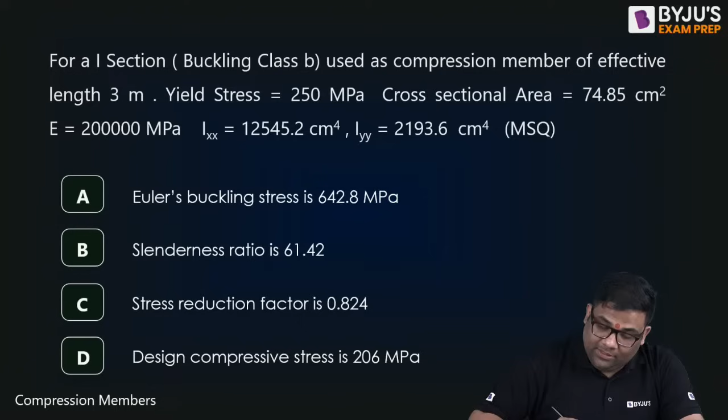We are getting 0.824. Yes, so that means in the MSQ, you can see that the stress reduction factor we are getting a right value, so that is correct. Getting this as right value, so this is also correct.

Okay, correct, right. Now coming to design compressive stress. What is design compressive stress? This stress reduction factor into Fy. Yes, this stress reduction factor into Fy. So 0.824 into 250, I am getting how much? 206. So this is also the right answer.

Any doubt in this question? Any doubt in this question? Clear?

Any doubt in this question? Clear? 206? Wrong.

Have to divide by 1.1. Never forget to divide by 1.1. So this is wrong. No, see, we will not get long questions, but they will ask you formula, na? See, I will tell you, you have to divide by gamma m naught. I will answer Prasant. So this value is how much? You are getting answer 187.27. This is the final answer. So this is wrong. Never forget to divide by gamma m naught.

Now, ladies and gentlemen, our question by Prasant was that do we get this type of questions when you are preparing for this session, will this session help for your state examinations, your SSC JE or your ESE? Will these sessions help or not? Let us discuss from starting.

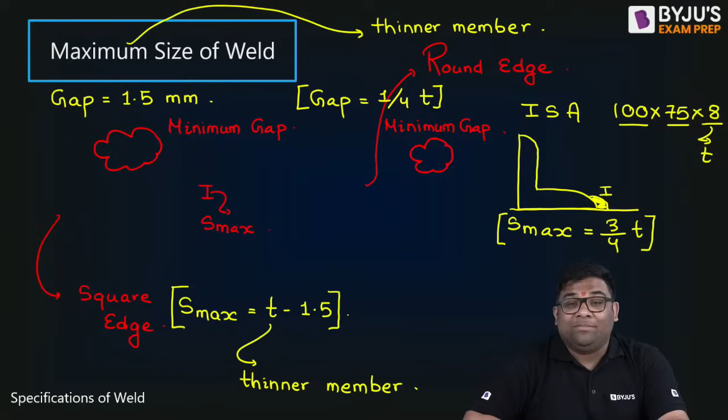In the examination they will ask you maximum size or not in the state exams. Yes, they will ask you maximum size. Yes, they will ask you minimum size. Next, they will ask you to find out the effective throat thickness for different fusion angle. They will ask you in state exam. First of all, this is for GATE, we have discussed for GATE. What my point is that same questions they can ask in state exams or not. Yes, they will ask. They will ask you all these values, right?

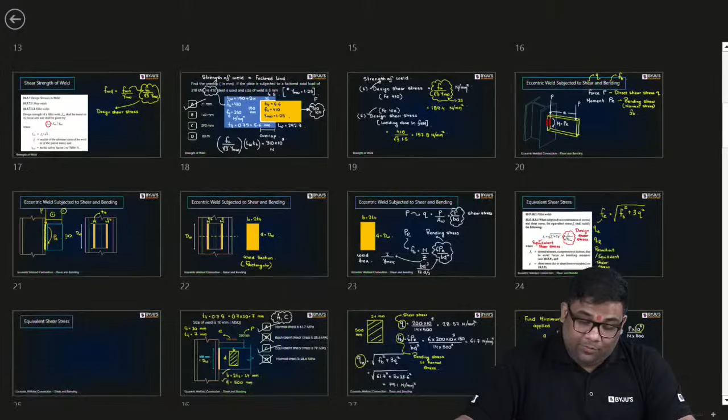You see this question, these questions they can ask in the examination, right? You see all this question. Suppose I am talking about this equivalent shear stress formula, they can ask in the examination, right? In the TSPSC examination, they can ask you the equation, or they might give you FB and Q and ask you the equivalent shear stress, right? So the point is that they might not ask you lengthy numericals, but the theoretical part, the formula will remain same, so they will ask you simple questions from this.

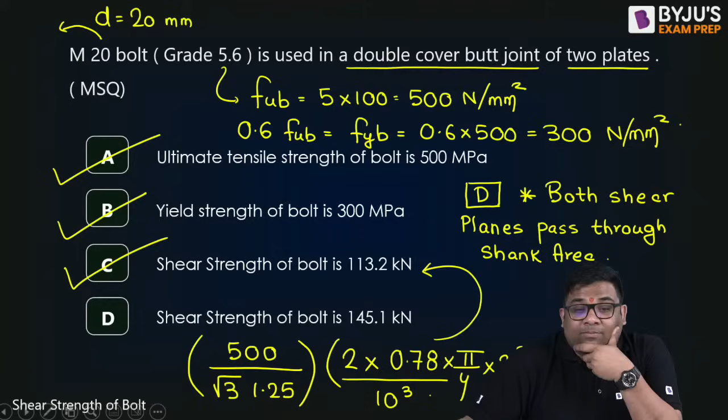They might not ask you lengthy questions, but yeah, these sessions will definitely help you for state exams because directly they will ask you the formulas, or simple questions, like suppose they will ask you that for grade 5.6, what is the ultimate stress of your bolt? Answer is 500. Or they might ask you to find out the value of KB, or they will ask you to find out effective length. Like this question which we solved, this question can be directly asked in the examination.

In your state exams. So that's what I always tell, that if you're preparing for GATE, automatically you're preparing for all exams. Just for other examinations, you need not solve lengthy numericals, that I can agree, but the basic theory part will remain same. Therefore, you have to cover in this manner. Otherwise, without understanding, how much you can mug, how much you can remember? So therefore, it's very important that we understand the theory properly, because theoretical questions, straightforward questions, they will definitely ask.

And therefore, I am conducting many sessions. If you see, in the recent past, I have conducted sessions like top 100 MCQs for transportation, top 100 MCQs for RCC, top 50 MCQs for your open channel flow. In those sessions, I discuss the straightforward questions which can be asked in GATE 1 mark or which can be asked in your state examination, therefore it's very important that we understand the concepts and then practice different types of questions.

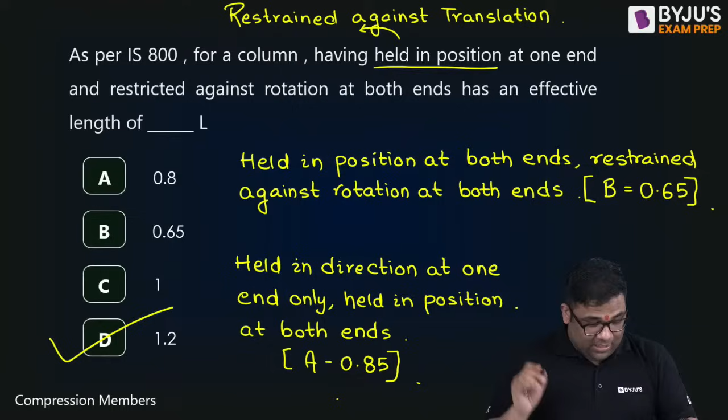Hamara mind, many students ask me sir why this problem happening with me, ye wo. The problem is that now this is going on, focus on here, why you are focusing on? Okay, focus on whatever is going on. When this is complete, we'll think of something else. Now your entire focus should be over here.

Design of compression members. It is possible, tell me, it is possible na, that this year GATE 2 mark questions will be asked from design of compression members only. Yes, and you attended this session, yes you attended. Please provide - arey baba, that is available in the channel, in the channel it will be available, haan milega. Wait for some days, wait na, it was conducted 2 days back na.

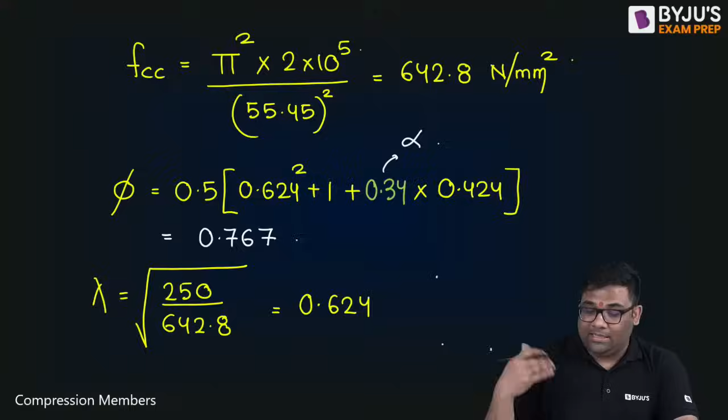Now see, so in this question we covered one of the most important portions of your compression members. Now I will tell you another thing, a new thing I will tell you in compression members. See, if you see this order, how we found out this thing? Now be very attentive about this session, okay? I am covering this portion means what, what is the meaning of this? There is very high chance that they will ask a question from this. So please focus here, okay? Please focus here. Now how we got into this FCD?

See, this FCD we got from where? From stress reduction factor, right, and FY, right, for FY. Yes, from FY and stress reduction factor we got this. Now stress reduction factor I got from where? From phi and lambda, right? Yes, now phi I got from where? From lambda and buckling class alpha. Yes, lambda I got from where? Lambda I got from Fy and FCC. Yes, and FCC depends on what? L effective by R minimum na? Yes or no? Yes, this is the sequence I can tell. So can I say that this FCD which you have got, it indirectly depends on Fy and buckling class and your L effective by R minimum, yes or no? Yes.

This FCD, it depends on what? It depends on Fy, yes. It depends on alpha. It depends on the L effective by R minimum, means the slenderness ratio. And therefore what code has done, code IS 800, for different Fy, for different alpha, different buckling class and different slenderness ratio, KL by R or L effective by R minimum, they have found out the FCD, and that is mentioned in the table here.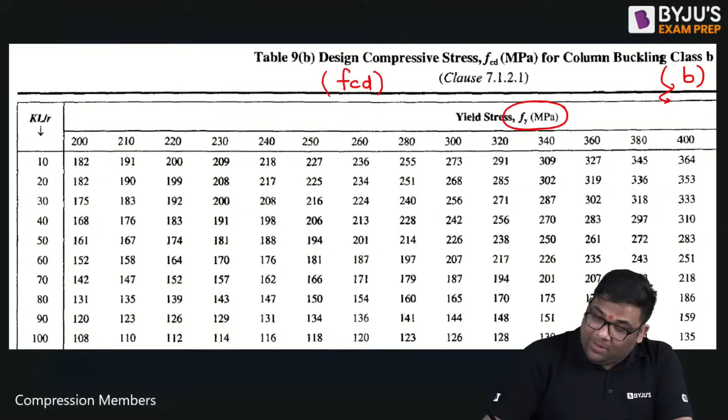FCD. Yes. So you see, for different Fy, I told na, for different Fy, for different buckling class, right? For different KL by R, this is what? L effective by R minimum, right? For different L effective by R minimum, for different Fy, for different buckling class, what has been done? You can see that the table is drawn by IS 800. They have done all the calculations and given this.

So you can see our Fy was how much? 250. Buckling class was B. And how much we got our slenderness ratio? 55.42 now. 55.42 will lie between 50 and 60. You see, for Fe 250, this is the column, right? In this, you see 50 and 60. 50 and 60 are this one, 194 and 181. So if you interpolate for 55.42, it will lie between 181 and 194, right? And therefore we got FCD is equal to 187.3 Newton per mm square.

If you interpolate also, you'll get the same value. I'm not interpolating, but if you interpolate also, you'll get the same value.

I'll highlight this again, little larger picture. You can see here, for 50 and 60, I'm getting for Fe 250, for Fy equal to 250. Okay, for Fy equal to 250, I'm getting these two values, and I can interpolate.

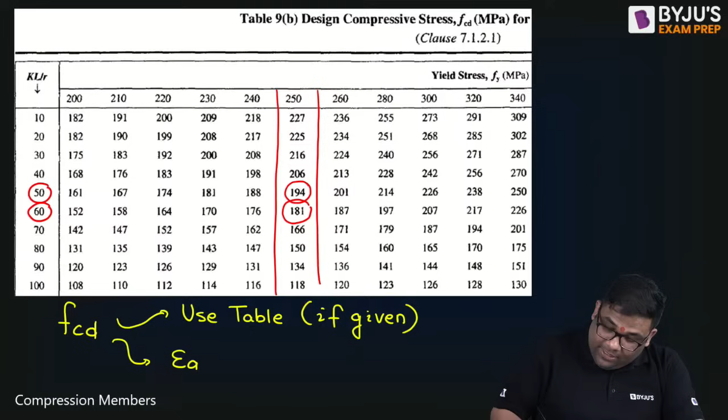Now, I can use this table when the table is given in the examination, right? If the table is not given, then I have to use the equations. So there are two methods to find FCD. One method is, use the table, but for that the table has to be given, right? If it is not given, that means the examiner wants you to use the equations. Or second is, you use the equations. Understood? Now, let us solve some more questions.

Compression members, there is a good chance they will ask in the examination. So please focus here. Find the design compressive stress for a double angle strut. Okay, double angle strut is nothing but this. Is connected to a 12 mm gusset plate on two sides by welding. So this is a plate. Okay, on two sides it is connected by welding. Okay, and the cross section area is given.

The R is given. R is same because it's an equal angle strut. So R is given, it is same. So I can say R minimum is directly equal to how much? Same, 30.9. So R minimum is given to you, right? Your L effective is not given. Now remember here, this is the strut of length 3 meter.

Whenever there is a single bolting, remember the L effective for struts will be equal to your L only. For double bolting, if two bolts are connected, the L effective will be equal to 0.85 of L. Yes, and if it is welded, then L effective will be equal to 0.7 of L.

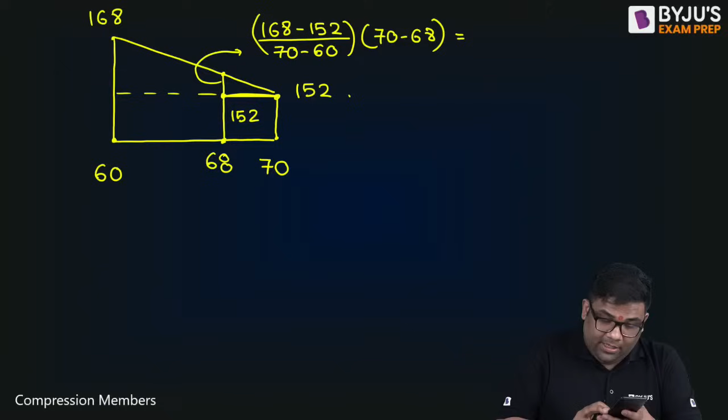This is the slope. And then this value is how much? This value is 70 minus 68. So this value is how much I am getting? This value is 168 minus 152. Okay, 168 minus 152 divided by 10 into 2. I am getting 3.2. Now I am getting this as 3.2.

So I can say FCD will be equal to 152 plus 3.2. I am getting how much? 155.2. See, even if you are using the equations, you will get the same value. Yes, even if you are using the equations, you can try at home.

So they can ask a question like this, finding FCD using the table. But for that they need to give the table, na? If they don't give the table, then you have to use equations. So I taught you both methods of finding the design compressive stress, let that be using the equations or let that be using the table. So whatever is the question, you can easily attempt that, right?

Tell me now, you're feeling confident about compression members or not? Tell me. Yes?

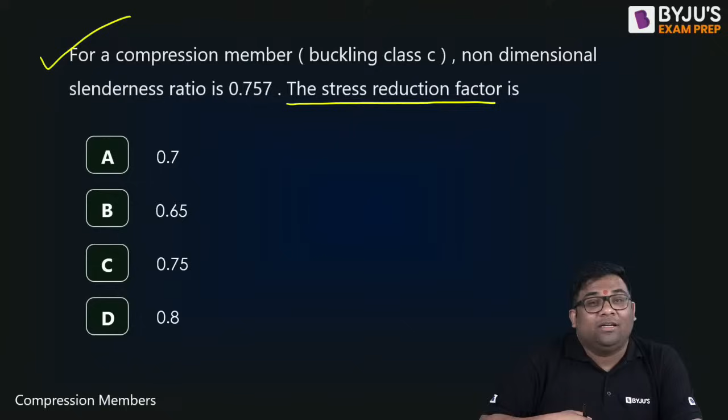Now in the examination, they might not always ask you FCD. They might ask you some intermediate calculation, just like this. So please solve this question and tell me what's the answer. They have asked stress reduction factor. So find out stress reduction factor, okay?

And suppose it is given that Fy is equal to 250. I am giving you the information, right? Only factor is asked. We know how to find out the factor, okay? You see, non-dimensional slenderness ratio lambda is given as 0.757, and buckling class C means what? Alpha is equal to 0.49. This you have to remember, right?

You can see that this question is not lengthy but has intermediate calculations. Yes, and they can ask you a question like this also. Always they might not ask you lengthy things. From the same lengthy thing, they will pick a small thing and ask you. Same happens with state services, same happens with any examination. Therefore, you need to be thorough with the concepts, and practice questions can be different for different examinations.

You have to practice more 2 mark lengthy questions. For GATE, 1 mark, practice short questions. For ESE mains, more lengthy questions. For IRMS and civil services mains examination, more lengthy questions, right? But when it comes to state exams, shorter. But the exam might vary, the concept remains the same, na? It's not that we use a different IS code for GATE and a different IS code for Telangana, different for Madhya Pradesh, Jammu and Kashmir, Assam, or IRMS. Somebody might say, 'Hey, this is IRMS examination, tough examination, so a different code will be used.' No, same code. Everything remains same.

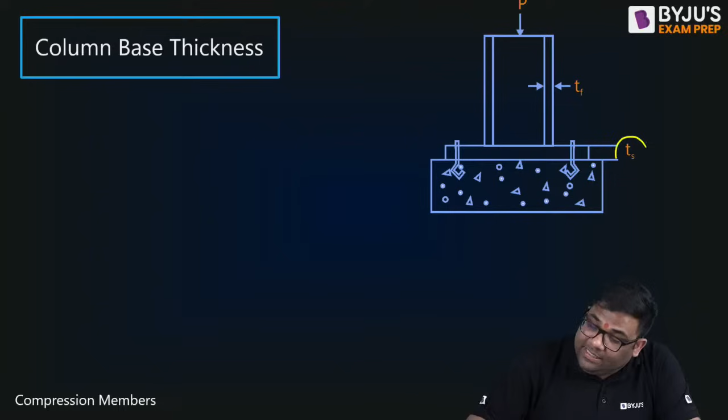Okay, next let us see the next, that is column base thickness TS. How to find out this column base thickness? The code gives a direct formula.

Here we put a steel plate so that the concrete below it, the pedestal concrete, doesn't fail in bearing. So this column base plate thickness is given by the formula. It is 2.5 W, where W is the pressure on that particular column on the plate, into A square minus 0.3 b square, divided by Fy by gamma m naught. This gamma m naught goes to the top, so I write it as square root of this, easier to remember. Whatever TS you get, it should be greater than the TF, meaning the thickness of the flange of the I section column you are using. It's a very straightforward formula.

How will we find out W? The uniform pressure under the slab is very easy: the factored load P coming, divided by the area of the plate. That is the W, the pressure, and then the rest you can find out.

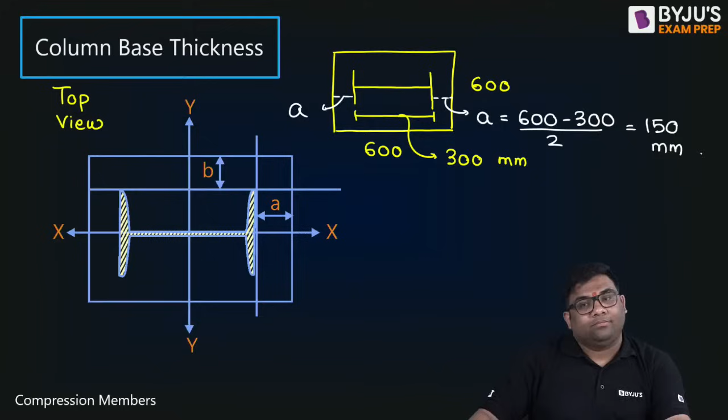Suppose I am telling that the column is having a size of 600 and 600, and suppose we have an I section of 300 mm. Then can you give me what will be A, this projection A? Tell me. 150, very easy: 600 minus 300 divided by 2, that is 150 mm.

So now let us solve one question to understand this better. This question they might ask in the examination, they have recently also asked it.

A slab base of 500 into 500, meaning this will be the plate size, is provided below a column. This column is an I section, ISHB meaning B for beam, but actually it's an I section. IS is Indian Standards, Beam just means it's an I section. 250 means the size is 250, H for heavy. 250 means this one is 250. The thickness of the flange is also given to cross check finally, this is the thickness of flange TF.

The width of the column flange is given as 250, this is also 250, it's also 250. The design column load is given as 2000, and the yield strength of steel, Fy, is also given. We need the thickness of the base slab.

It's very easy. First you have to find out A and B. When interested in finding A and B, you see this 500, 500, and this is 250, also 250. This flange will always be 250 here, but sometimes it might be 180, 200 depending on different circumstances.

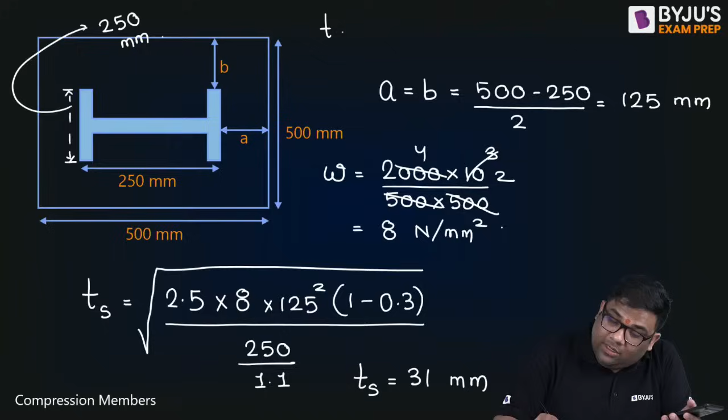Answer this question, how are you getting? 31.02, almost 31 mm I can say. Whatever TS you got, it is coming more than your TF. TF was some 13 point something, na, or 9.7. It was 9.7, yes, it is coming more than that, so it is perfectly fine. If you ask a question on this, chances are there because column base is part of column actually, and it's a very easy, straightforward formula you can do.

Let us go to the next thing, beams. In beams, first of all, they can ask you questions on how to identify plastic, compact, semi-compact and slender sections. Then they can ask about laterally supported beams, laterally unsupported beams, and questions on web crippling. Unsupported beams are looking a little complicated, so chances are less. So today we'll see how to solve questions from laterally supported beams, having the maximum chance to be asked in the examination.

So we'll see the design bending strength of a laterally supported beam. Now laterally supported beam means, normally we take I section as the beams. Laterally supported means the top flange is embedded into concrete or supported by any means. This is what laterally supported beams are, also known as laterally restrained beams. Supported means what? You can see it is restrained, yes, laterally restrained or laterally supported.

In this, how to find out the design bending strength? Design bending strength means MD. What is the design bending strength? It means how much bending moment I can apply on the beam without failing it. That is very easy, I've also explained this a few lectures before. This design bending strength is nothing but the moment of resistance or the moment carrying capacity.

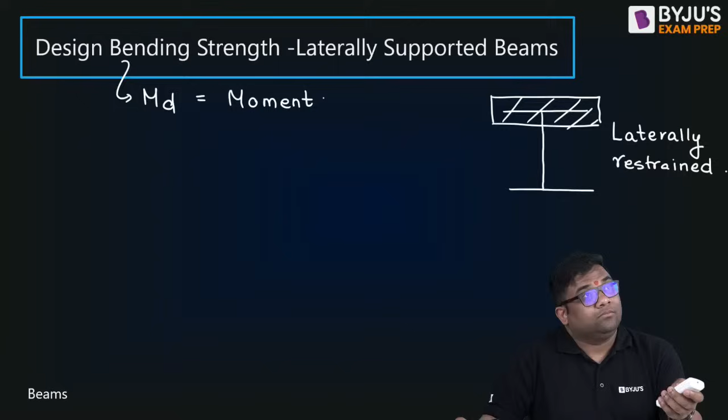The moment carrying capacity, or the moment of resistance. Now, how do you find out the moment of resistance? The strength of beams, if you remember from strength of materials, that was the section modulus into your yield stress, na? Yes or no? Section modulus into yield stress. Here we'll introduce the factor of safety, gamma m naught.

Now, if it is a plastic or compact section, then what will happen? The plastic moment capacity is developed, so this equation changes to Fy Zp by gamma m naught. And when it is semi-compact, then the plastic moment capacity is not developed, so this remains elastic, so it becomes Ze by gamma m naught.

Yes, very easy, see so easy na. This is the elastic modulus, that is the plastic modulus. This is the elastic modulus, and this is the plastic modulus. This is nothing but the plastic modulus.

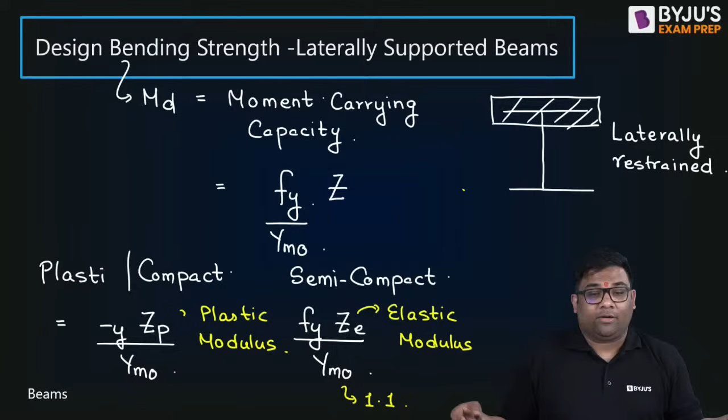Okay, so this is a beam given. It is written that it is semi-compact. Section is semi-compact. If section is semi-compact, tell me what I will use, ZE or ZP? Semi-compact, ZE or ZP?

ZE, very good. So the equation will be very simple. It is ZE Fy by gamma m naught. Very straightforward question, very straightforward question. They will ask you straightforward things only.

We have just become complicated. Our mind has become complicated, I don't know how it happened, but it has happened. Okay, we don't accept it. See, if you are complicated, suppose how many of you feel that your mind has become a little complicated? How many of you think that your mind has become complicated? Please write in the comment section. How many of you think your mind has become complicated in the last few years? Or is it becoming complicated? Or have complications developed in your mind? Or are external factors complicating your mind?

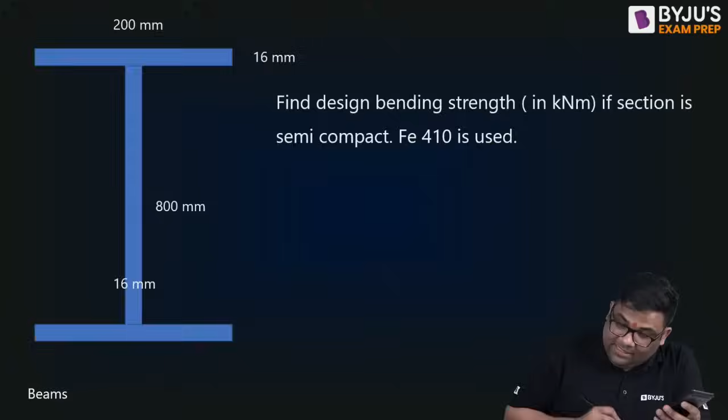So when I am finding the design bending strength - very easy. The design bending strength will be equal to ZE, that is 4.2 into 10 to the power 6, into Fy divided by 1.1. You see this is in Newton mm, so I'll convert it to kilonewton meter by dividing by 10 to the power 6.

So this gets cancelled, I get 250 into 4.2 divided by 1.1. I'm getting a value of 954.54, right? I'm getting almost 954.54. That will vary, it will be in a range - some people will get 955, depends on what approximations they have taken. In the examination they will give you a range, so no need to worry.

You see this short question, right? You can easily solve this kind of question if they ask it in the examination. Very good, so that ends our session, okay.